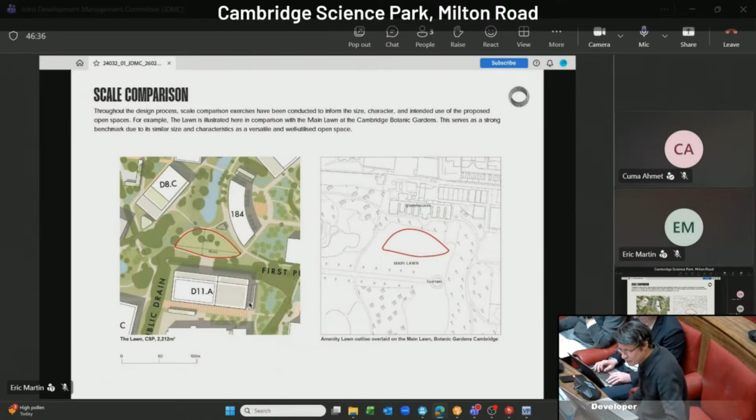We've been doing a lot of comparative studies with other places in Cambridge that have similar uses to the ones we'd like to introduce into the park more actively. This is an example of what we call a lawn, which will be an active green space at the heart of the park, and how it could be used—we've been thinking about it in relation to other similar places, such as the Botanic Gardens.

This sets up a robust strategy for going forward. This is obviously going to have to be a phased development—it's complex, and it will need to be deployed carefully, but with green infrastructure, blue infrastructure, and connectivity infrastructure at its core all the way through.

We would outline a series of scenarios of how this could happen, but essentially the planning application would have flexibility to enable this to happen in different ways. There will be materials where we show, for instance, early transformation in relation to the future of the park.

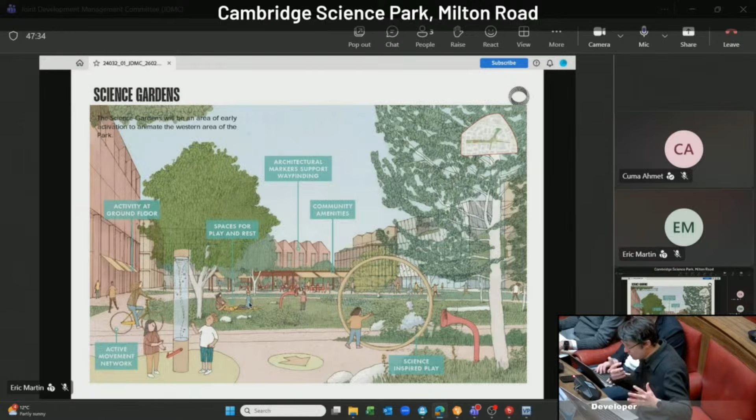There's three main components to it in terms of control documents. There's going to be a series of parameter plans, development specification, and design code, and then there'll be a series of supporting documents that would paint a wider picture and go into more detail on how those three components work. Development specifications is essentially the what, how much, etc., and the design code and parameter plans are the how that's going to happen.

We have included a series of examples of how the parameter plans are looking. The parameter plans are very important, a suite of plans that outline how the vision takes shape very specifically.

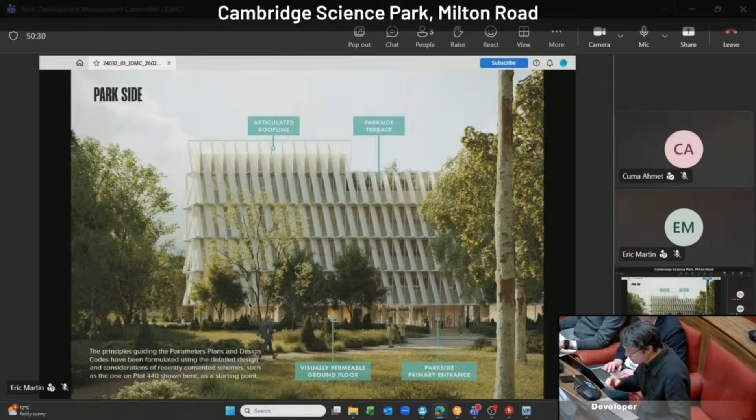We have outlined three main conditions in the park in order to develop all the parameter plans and the design code: one is park side, the other is street side, and finally the edges of the park. We have based a lot of these on developments that have planning consent, including 440, which you just saw, and extracted that knowledge to create a series of approaches and strategies that then set out the more specific sets of documents.

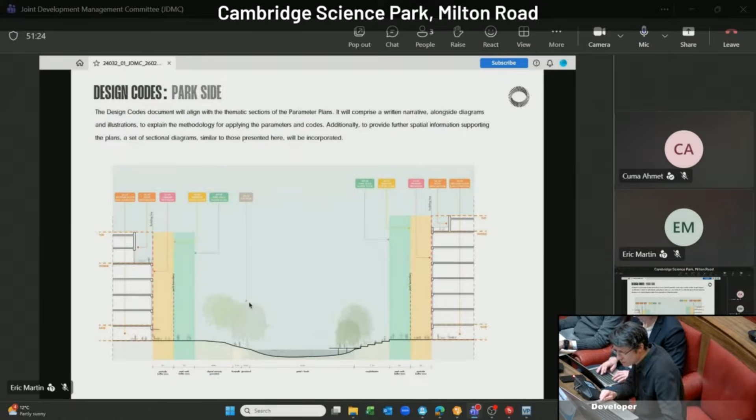For instance, for the park, we will describe in some detail how it will get transformed into a place that works better, that is better connected, that works better in terms of biodiversity net gain, blue infrastructure, etc. Then we'll have a series of drawings such as this, which, in support of the plans and in section, will describe the place in three dimensions. These two sets of information will start to paint a better picture and create a very specific set of guidelines, so anyone developing the park in the future can follow this through, and any reserved matters applications that come in the future could follow a very clear set of codes.

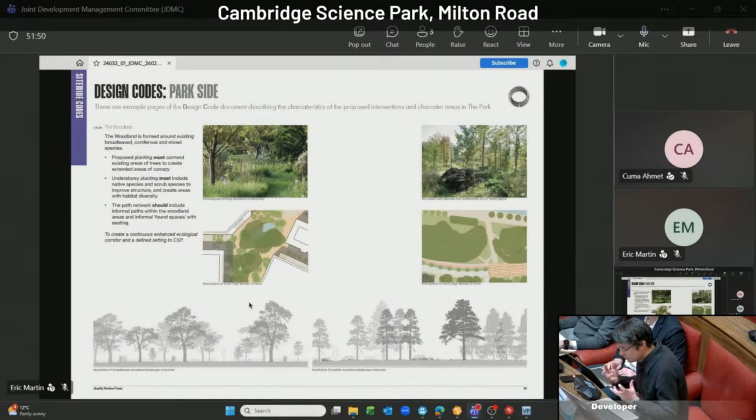These are examples of the type of pages that design codes will follow. In this case, for the open space and the park, we describe specifically what type of character, as well as the type of planting, etc., that could go into it.

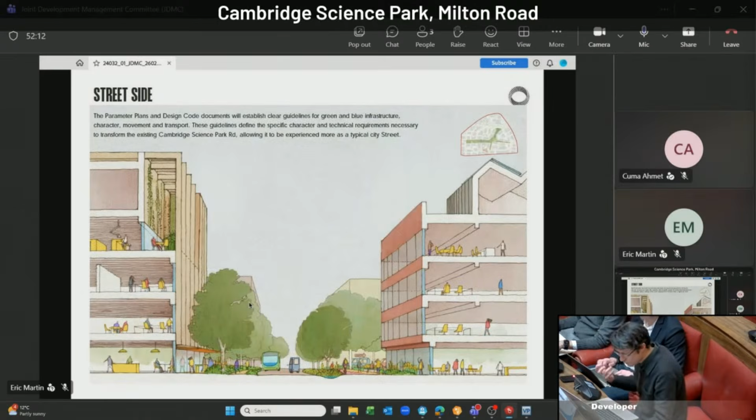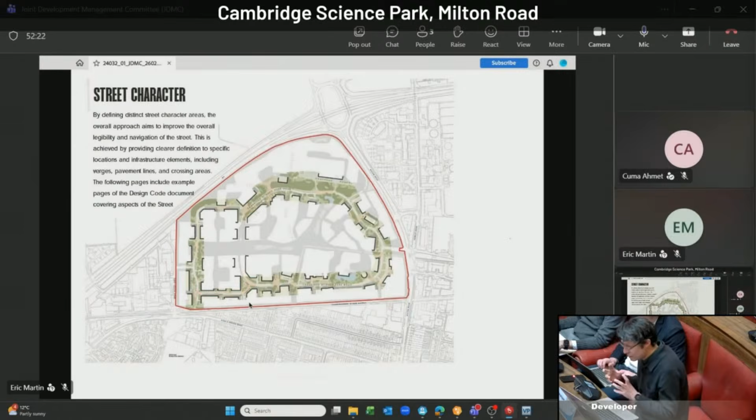And similarly, we'll do this with the street. So the transformation is going to be from the loop road into a street—something more legible, better connected, easier to use for different modes of transportation, including cycling and pedestrian, but also with biodiversity net gain embedded into it, SuDS and all these things, where buildings participate more actively. We have defined a series of street characters that inform how that space then gets contained by buildings. So first we define the open space strategy of the street, and then how buildings relate to it.

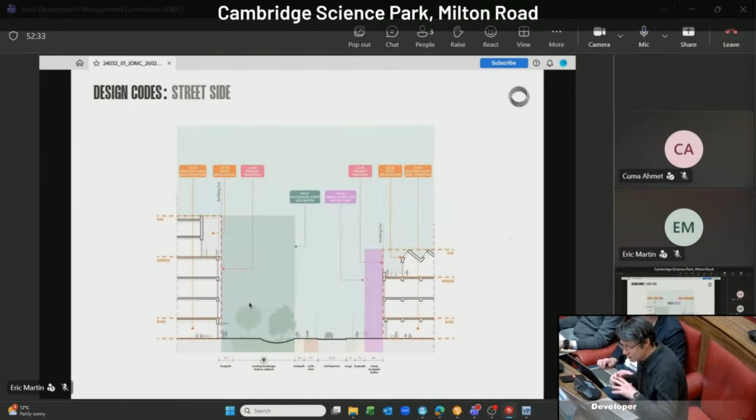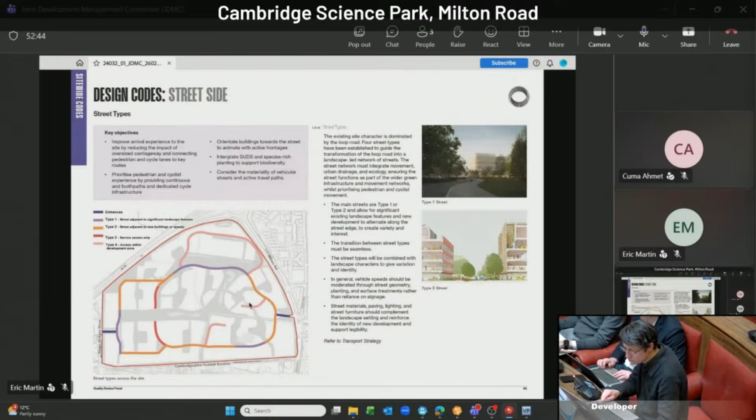And then we'll have a similar set of information that sets up more specifically the characters of the street in different areas and in response to specific conditions. As you can see, these go into some detail in terms of describing how the proposed or existing conditions get transformed into proposed, and the parameters we'll have to follow.

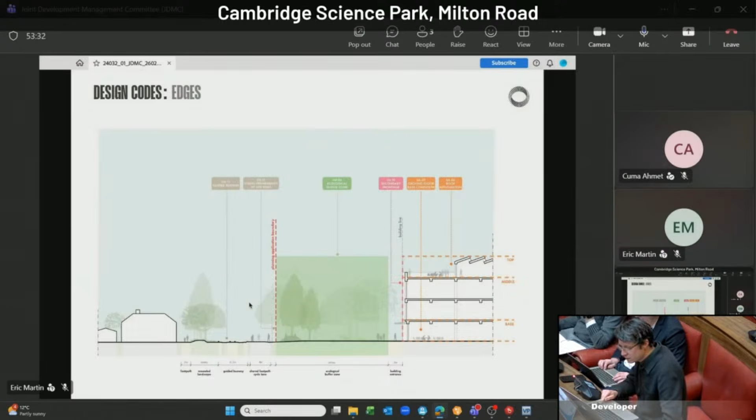Similarly, the edge condition is very important, and we have long conversations with the planning team about how to treat the edges. It's not only about the relationship of the park with its adjacent neighbors and how to create a more permeable park, but also the impact on long and medium range views, so there's an impact assessment in terms of views where edges are very important. We'll describe how those edges need to be treated, the opportunities for transformation, etc.

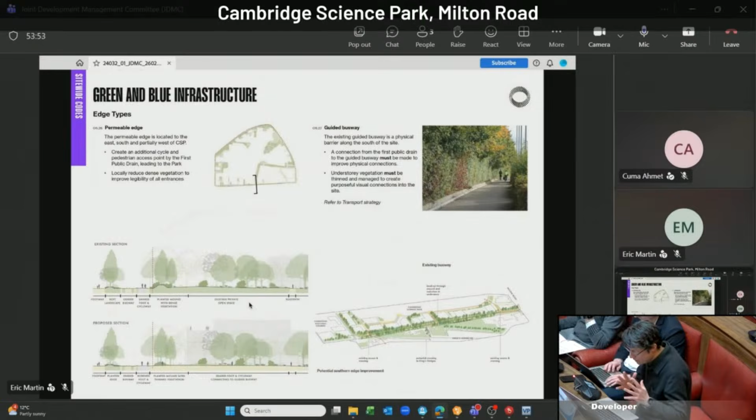I'm just whizzing through these pages because you'll hopefully have had the opportunity to see them in the pack we submitted, to get a sense of the kind of wording we're using, the musts and the shoulds - what must be followed, but there's still flexibility within that to allow for creativity for the developments that come forward to do interesting proposals.

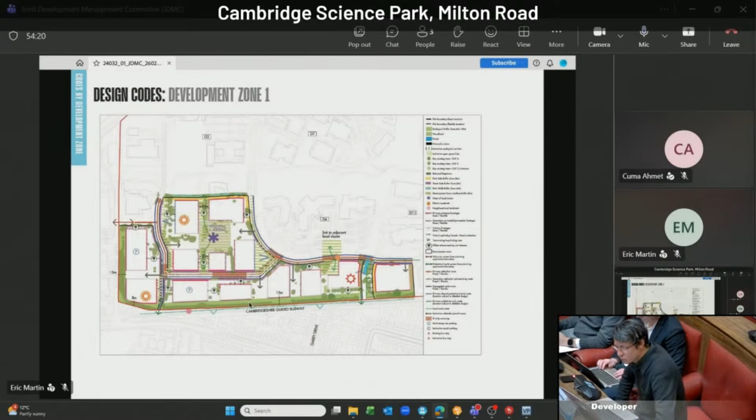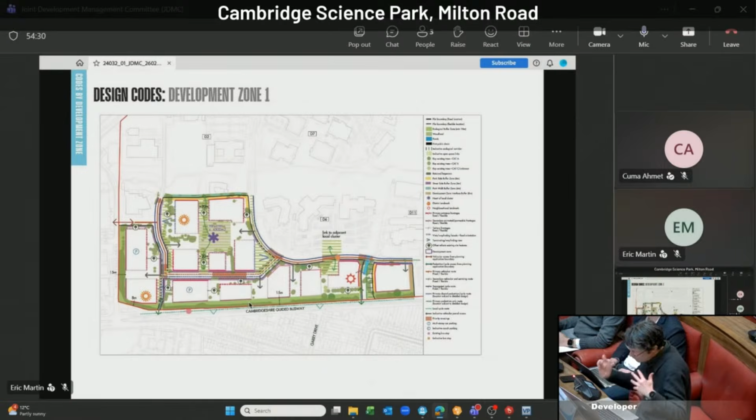The final section will go into more detail on some of the development zones, into 4 development zones which we envisage are likely to come forward earlier. The information in these drawings goes into more detail in terms of defining how the open space relates to connectivity, frontages, hierarchy, and ensuring enough information is embedded into these documents so that everyone following them as guidelines is as clear as possible on how to respond.

So you'll see we've included 3-dimensional information that follows from the plans to set a kind of strategy that starts from the green and blue infrastructure, i.e. the plane of the site, but then goes into maximum heights, things like frontages, facades, landmark buildings, etc., and all the way into massing and roof articulation to create an interesting place.

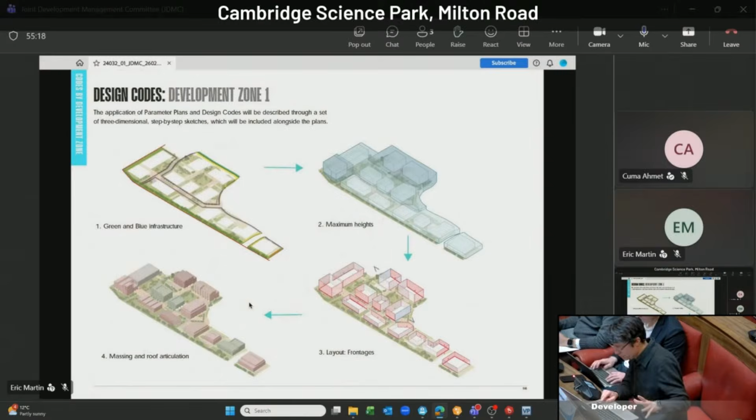So we're not designing buildings here, but we need to make sure there's enough clear information for whoever comes in and develops a site and designs a building, so that the developments are of high quality, considering connectivity, BNG, green and blue infrastructure, and all these things that are important for the park.

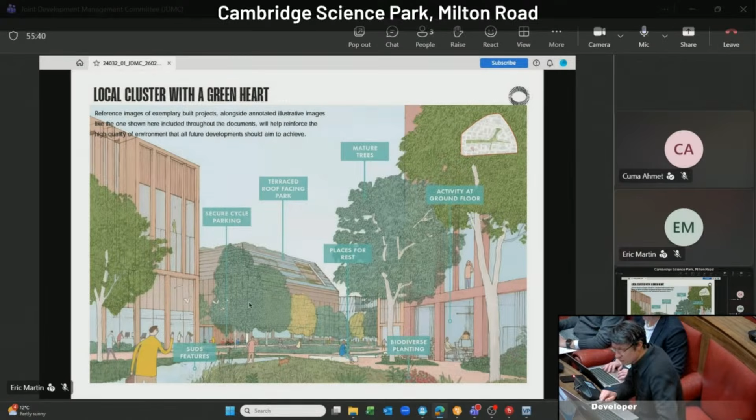We'll also have illustrative materials such as the information and images you see on the screen, including an illustrative plan that outlines what the aspiration could be of the park when it's completed. This isn't just setting up a scenario for the first years - if there's enough information there, following the codes and parameter plans, this vision could be followed all the way through to a complete park at some point in the future.

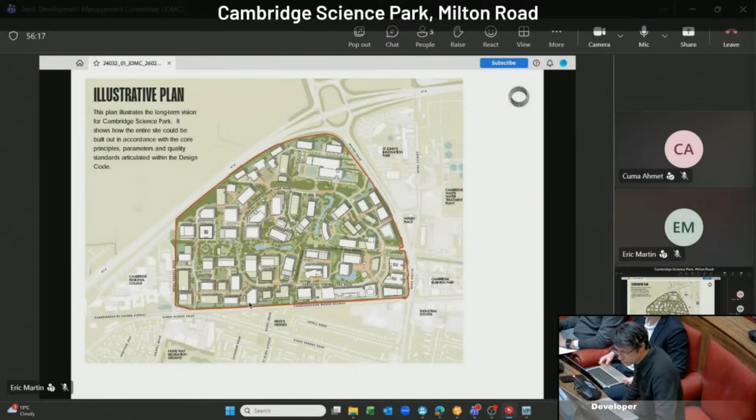So that is the last slide, and I didn't want to go into too much detail about the information because I'm sure members of council will have questions to ask, but also hopefully you've had the opportunity to read through the information submitted in advance. This is just a snippet of what we produce, and you'll get a more comprehensive set of documentation that explains how all this works together. Thank you. Thank you very much.

Before I open to questions, I wonder whether you would like to highlight any particular changes in emphasis or theme since you last presented to us in November. Is there anything we should particularly draw attention to which has moved on?

Yes, the short answer is yes. More than changes, through the feedback and questions we received back in November, and through the process with the planning team and officers, we've been informing the proposals all the way through. We've had more than 10 pre-app workshops and sessions so far, where what you see in the documents has been shaped actively through these conversations with the planning team. For us it has been a very positive and really interactive process - what you see in the information hasn't been generated in a vacuum, but has been very collaborative.

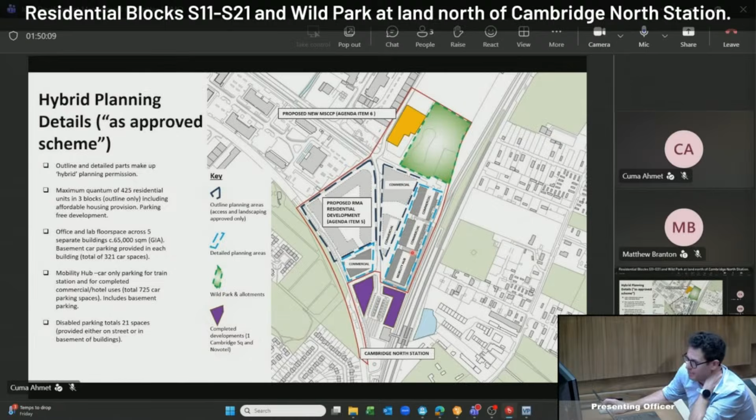Just to finish off the presentation, an indication of how the parking provisions will change, with focus on rail parking provisions. As mentioned, the multi-storey commercial car park proposed will mop up effectively all commercial car parking on the site, so there's no net change there. Rail parking will in fact increase by an additional 200 spaces. The impact of that increased parking provision on the general highway network is currently being discussed with the County Council Transport team. We're confident the applicant team today for item 6 will feed back further on those conversations. That's the end, thank you, Chair.

Just before you move away from that spot, so we're focusing, I hope members, on the reserved matters today, and we'll be taking these 2 applications separately. Obviously there's some apparent overlap between them, but I'll try to confine the questioning to the relevant application in each case. Anything you want to say about the extent of the reserved matters, anything unusual about it in this case?

There isn't anything unusual necessarily to mention at this stage. I'm sure the applicants will present it quite clearly to members today and set that out in context of everything else I've just speedily run through.

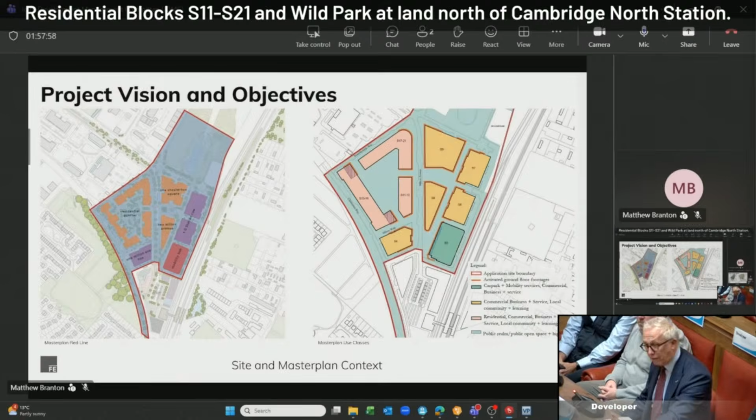We are going to talk about the multi-storey car park. It is part of the 3. You will be aware of the challenges, you know, this is a planning committee. It works in a commercial environment associated with building things at the moment. Basements are hugely expensive. The multi-storey car park performs a simple function.

It's very similar to car parking on the science park. It provides car parking in a more efficient, centralised and affordable manner. Therefore, it gives us a better chance of delivering the 600,000 square feet we've got here. It creates negligible additional trips and results in significant carbon savings.

We will not do all of this up front because we want to encourage active travel. We're next to the station, so the parking will be carefully phased as the buildings come forward. Within the trip budget, we can talk about this. Provision has been made for increased Network Rail passengers.

People will be aware the station has got very busy. Looking at the numbers last week, passenger numbers have gone from 800,000 in 2019 to 1.5 million in 2025. So the station is performing the function that it's meant to. It needs a bit of car parking, and we're future-proofing that in the trip budgets.

The final NMA you'll see is the tweaking of the landscape that's been generated by improvements to the highway and us putting the car park on what is currently allocated for the logistics. So that's probably more than my 3 minutes, Chair, apologies, but hopefully that sets the scene usefully for everyone.

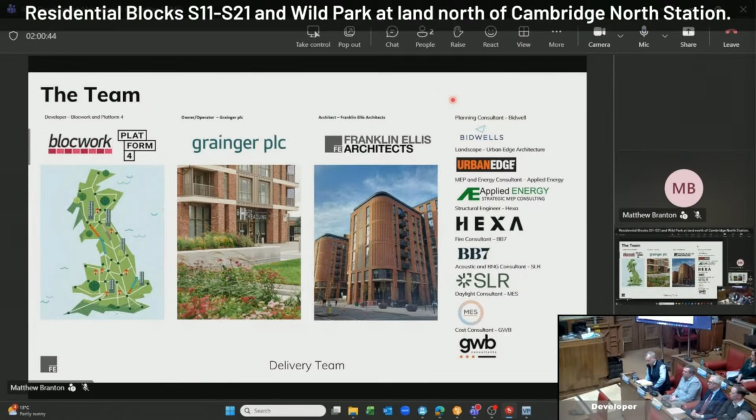There's a much larger team here today, but here today we've got Matthew presenting from the architects, Franklin Ellis, at the end there. We've also got Toby from our M&E design team to answer questions on sustainability. Obviously Mike, and critically John here is from Grainger, who is the funder and will ultimately own and operate the scheme. Just move on to the next slide, please.

Just to reiterate, this is about delivery. One of the schemes that we, as a team, have delivered recently was in Nottingham. Exactly the same team is looking to take this forward, and we've actually taken the planning team round the Nottingham building called the Barnum, just to give the team a feel for the quality of what we're looking to deliver in Cambridge. I think everyone thought that was quite useful in terms of evolving the design together to where we are today. So I'll pass on to the team and let them present further. Thank you.

Just a quick slide from me on the planning process. This is really just reiterating what's been mentioned before. It's been a very collaborative, very positive process for us. We've gone through a series of pre-apps from taking on the initial outline. The visit to the site, to our example site in Nottingham, was welcomed. I think that was a really good opportunity to demonstrate the building type that we're talking about, the build to rent that Grainger are delivering.

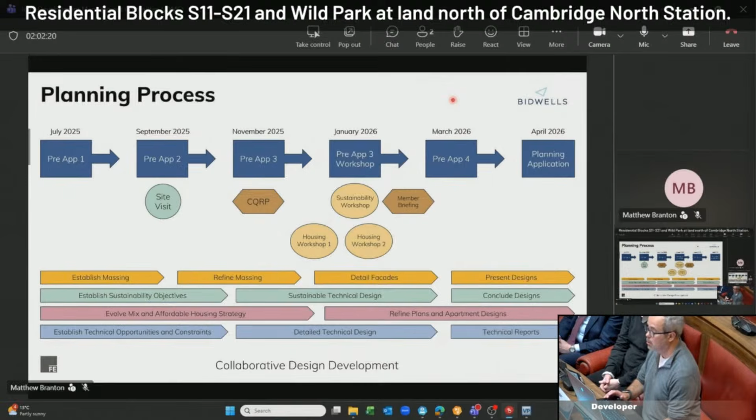We've also gone through the process of the quality review panel and several workshops for the housing on the affordable side, but also on sustainability. It's been an iterative process, but a very good one. So it's really just a thank you to Cuma and his team for helping us bring the scheme together, and I think together we've come up with a really good deliverable product. So I'm going to hand over to John on the Grainger front.

Hi, my name is John Wood, Grainger PLC. A quick whistle-stop tour of the business: established 1912, FTSE 250 and the largest listed landlord in the country. We operate in the region of 11,000 homes, with a further pipeline of another 4,500 homes coming through. Our mission, if you like, is to professionalise the private rental sector, and we're doing this in a number of ways.

Firstly, we're providing high quality homes. Of that 11,000 homes, we've probably got in excess of 25,000 people living in our schemes. We've got a high retention rate - numbers just out last night differ from the slide, we're actually at above 98.1%. That 0.1% means a lot to the execs. Average tenancy length has nudged up as well, to 32 months. So obviously in what we're providing, we're getting something right.

We've got a whole staffing model, so everyone you see working in our schemes are Grainger staff. We don't outsource anything to managing agents - we do our own lettings and everything. Then we're bringing in IT - that's the third way that we're trying to professionalise the system. We're using tech in a number of areas.

It's straight from the application process - you can do everything online if you want to. Once you move in, we've got the app, so you can speak to people, book repairs, book bookable space, meeting rooms, dining rooms. You can even move out very easily. We're trying to do a full cradle to grave using technology, but there are instances where people are technophobes, so we've still got full staff on site, so you've got a people person you can go and speak to.

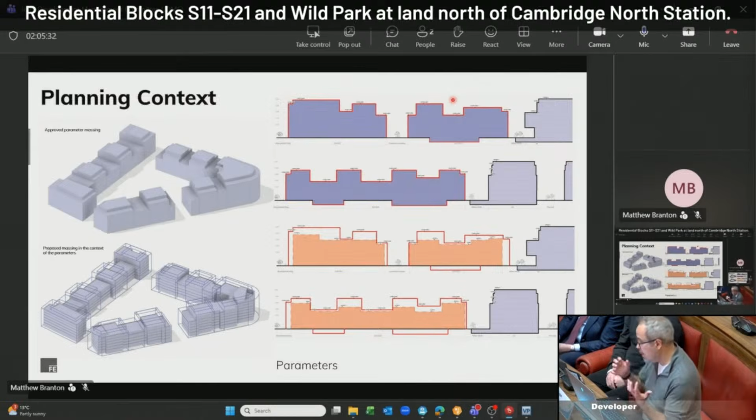As an illustration, top right is the maxed out approval, the parameters. Bottom right is where we sit within that. And you'll see we've actually dropped scale slightly in terms of the absolute heights.

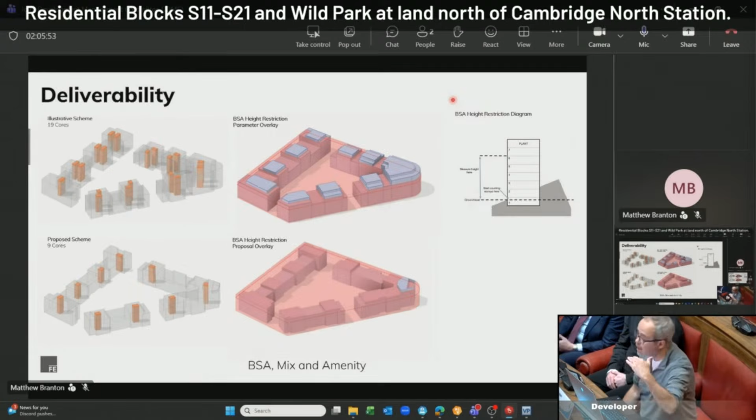That's mainly as a result of, in the progression from outline to reserved matters, the Building Safety Act came into force. That set some key criteria in terms of usability and set height levels for different classifications. So partly on the design front and partly on the delivery front, we've now adjusted to sit below that 6-story threshold.

We just poke out here with a little bit of plant, but no residential accommodation. So we sit underneath what's termed as the high risk building threshold. We've also used that opportunity to rationalise the cores to increase deliverability.

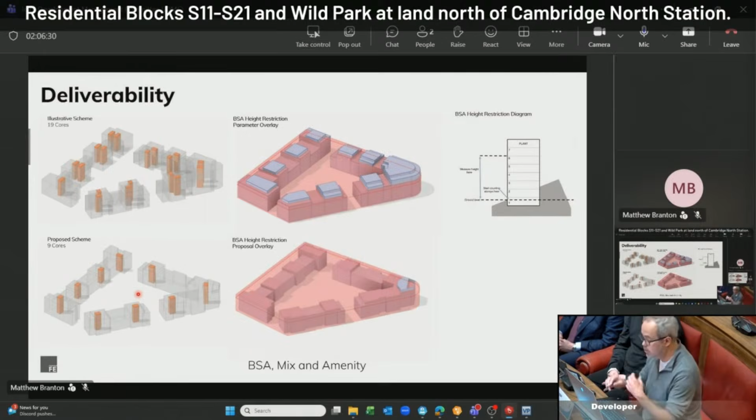We've dropped from 19 cores to 9. But in that change, we're still holding on to all of the key characteristics that were built into that outline approval. So just going to drop back to Richard, I think, just to touch on the affordable element.

Just to clarify, Grainger will also, Grainger have an RSL called the Grainger Trust, so they will also be managing the affordable homes. The scheme will be delivering the same number of affordable homes as per the outline, so I think it's 62 units.

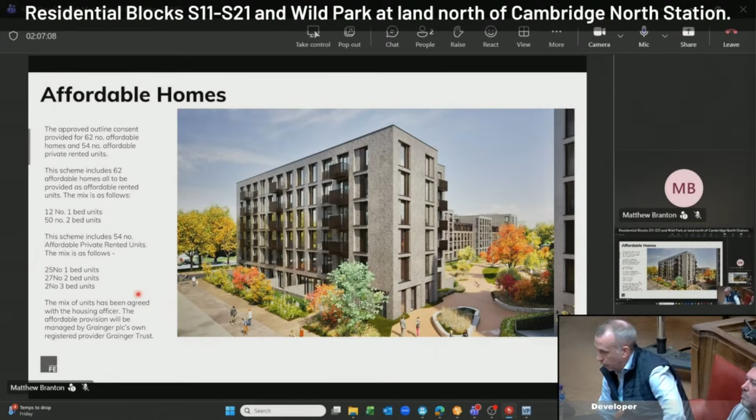The mix has been agreed through meetings with the housing officer and Kuma and the team. I think it's quite useful to point out that Grainger will be managing this element of the scheme as well, and it's all coming forward as one.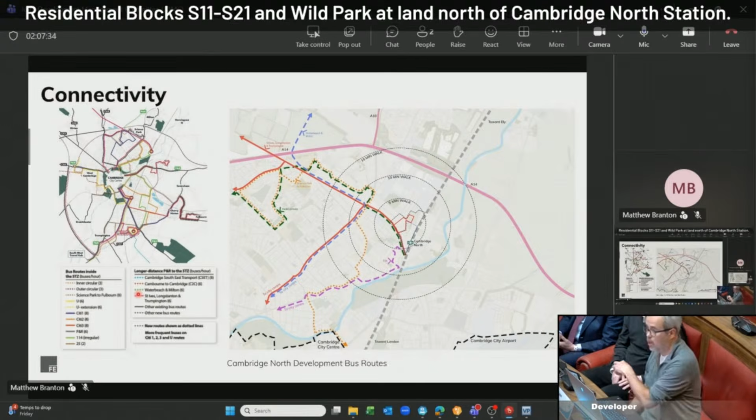Thanks, Richard. Connectivity. Now, you know where the site is. It's an extremely well-connected site, extremely sustainable, obviously right next to the train station, but also immediately adjacent to the substantial bus route. So we're very connected, very sustainable, a perfect position really for John's build-to-rent offer, for the Grainger offer. I'm not going to dwell on that too long.

So just to talk a little bit about the attitude to the design evolution that we took, taking the outline forward as guided by Cuma, Jonathan and the planning team as well. So if we start here, top leftish, base volume.

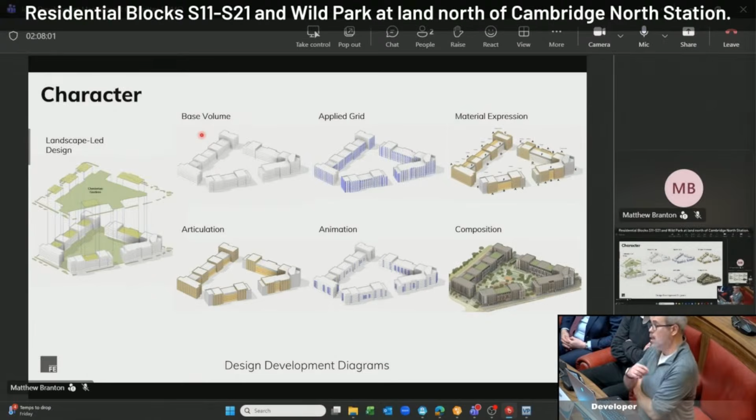The base parameters set the volumetrics, set the overall attitude towards how blocks were distributed and that articulated form. What we've done is, on top of that, applied a rigorous grid to allow for the fenestration to knit all of those individual parts together. So we get some rigor in that form, which is purposefully broken up to scale.

Moving on from that, we use material selection. This is largely a brick-built scheme with a local palette, but we use subtle variations in that palette to help reinforce the articulation, the vertical and the horizontal, how the section and the plan are broken into different planes to help handle the scale of the development.

Then we reinforce that purposefully with the articulation of the fenestration type. So you can see from the diagrams a series of cores which are expressed vertically, so we tend to emphasize the vertical on those elements.

And then we have linking pieces, which emphasize the horizontal. We want lots of legibility of where common cores are, where entrances are. So it's a legible building for the inhabitants, but also all those passing.

It's going to be a well-trafficked area in terms of trips and such like. And also we are putting particular attention on areas that are kind of gateway, where we announce the scheme as we come towards it from the north, and also where we open up towards our courtyard. So the diagram on the left, landscape.

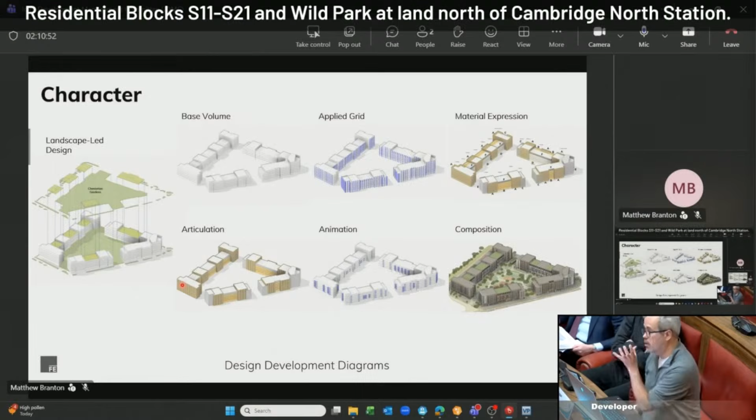We also then layer on balcony use, different balcony types, different extensive glazing, and then the last bottom right is composition. So with all of those things, we've got a lot of competing agendas, things that push and pull, and we've been working that composition with our design team, with Cuma's technical team on the sustainability side, and we've had very successful workshops on that regard.

The blue is the amenity spaces that are there for the residents, contained and offered by Grainger. John made the point that the offer from Grainger is very amenity heavy, and a very wide range of spaces, co-working spaces, reception, all of the back of house support you now practically need in life for parcels and such like, but also a lot of community focused places.

It's a place to meet, to gather. There's a program of events, there's TV rooms, cinema rooms, there's large kitchens, so you can actually have a dinner party, invite friends around a larger dedicated space. So very flexible - those are the blue spaces.

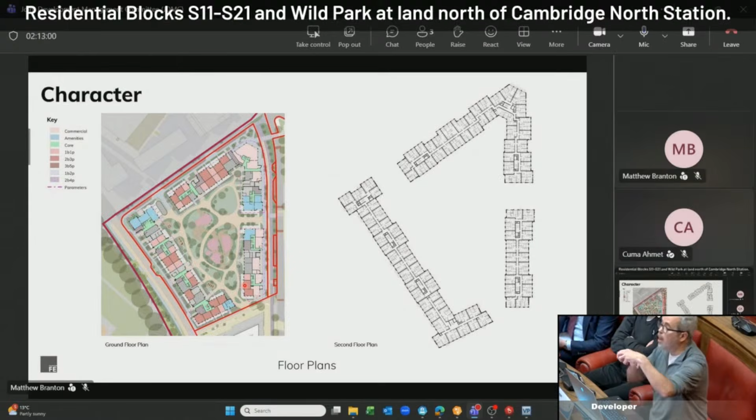So on the right, upper floor - it's a stacking arrangement, but it breaks down as we go up the height of the building. So character - talked a little bit about articulation. It's a heavily articulated massing form, and then focus is applied in a few key areas. This is the block that introduces the scheme from the north.

Matthew, just to say that we are running out of time, so if you could draw things to a conclusion, please. Okay, right, okay, yeah sure - quite a few, so I'll rattle along. Sorry, I thought Mike's time was separate. We were told Mike three minutes to begin by the chair. That's fine, oh fair enough, yeah that's fine, carry on. Sorry, I will pick up the pace slightly.

Frontage articulation - I talked about the applied grid, the grid of the fenestration that we flex, so that's very strong and binds together. Materials - that material palette, changing, highlighting gateway, highlighting the cores and such like, and then character animation.

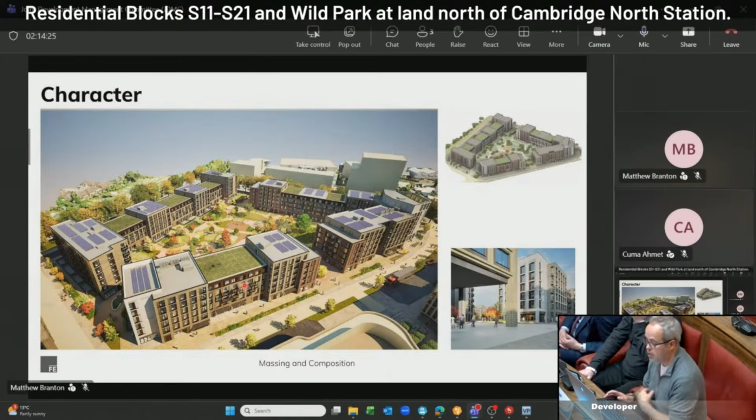We've got this ground floor edge which onto Milton Avenue, which provides a whole range of commercial spaces as well as the entrances to the individual apartments as well. And that goes together with the Wild Park off-site as well to provide the overall composition, which we've tuned and also satisfied the sustainability aspects.

So I'm going to very quickly pass on to Toby. Lean into your mic. Yes.

Yeah, hi. So the key thing to say is we've had some really good sustainability workshops with the planners. We've modelled over 10% of the different flat types. They're very pleased with the proposals that we've put in place and all the steps that we've taken to date. And I'm happy to answer any questions on any detail later on.

On the kit of parts that I referred to in terms of the elevation, we've got a lot of reveal detail in the fenestration patterning, which helps in terms of shadowing detail, but also helps in the environmental aspects, gives us high-level shading and such like.

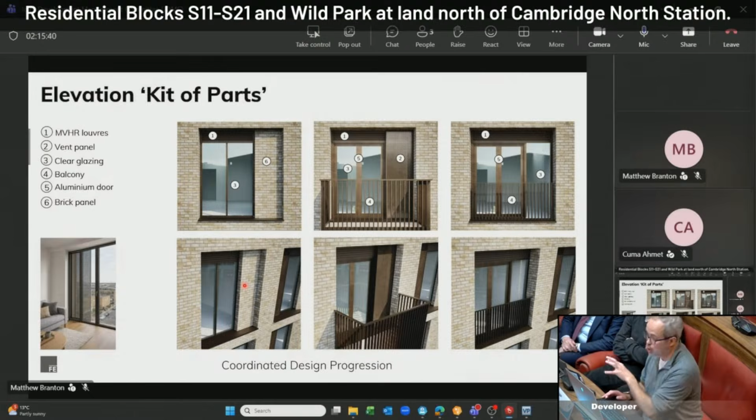And then by orientation, we flex that kit of parts to allow adequate ventilation and high levels of daylighting. We're still in a very final tuning phase, but we've got a 1% issue in a very small area of the site, which we're refining through. We used that to tune, through the pre-app process, through the technical design, and through liaison with the sustainability team, we've successfully tuned to a scheme that passes to a very high standard in terms of daylighting, but also, from Toby's point of view, that we contain overheating. So orientation and tuning has been a very important part of the process.

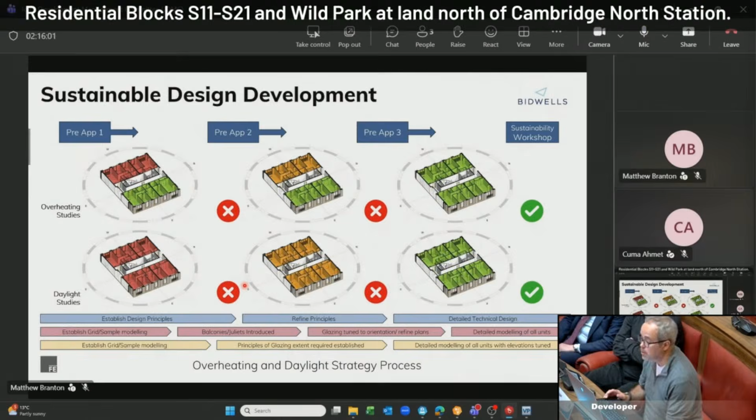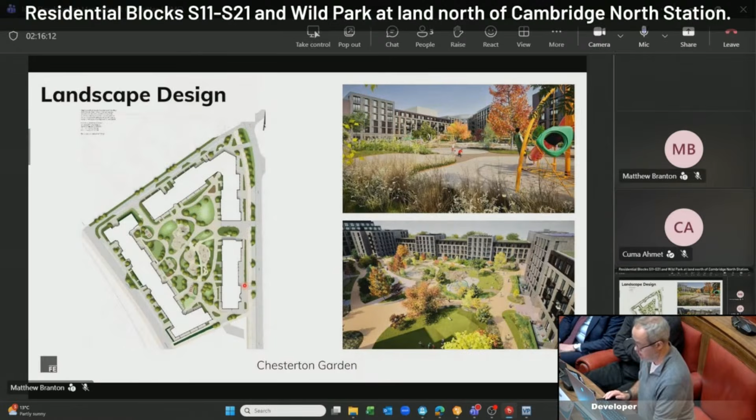Landscaping design, as Mike said, is approved. It's a great space. It provides a range of amenity spaces, and we're just adapting around the edges as necessary. And then just a couple of illustrations on the amenity spaces, the kind of quality of the amenity spaces, which are scattered in the light blues.

The cores, the access for residents into the building, are spread across the development. The purple arrows show those. We also have visibility through those cores so that there's a sight line from street to courtyard, to entice and open that offer out. And also you see in the purpley, light bluey colour, the bicycle storage. So we've got at-grade bicycle storage distributed, policy compliant, across the scheme. All the residents' is inboard, distributed by core, as is the refuse structure.

Yeah, we'll leave it. That's fine.

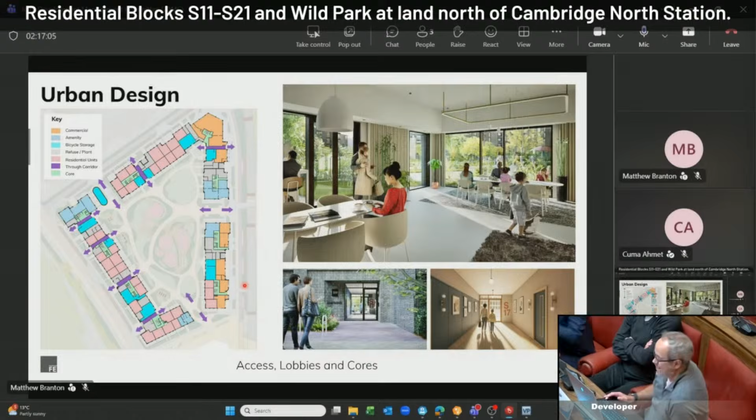Okay, thank you very much, all of you, for that presentation. Richard, was there anything you wanted to add to wind it up before we open it to questions?

Thank you, yeah, just to wind up really. So 12 months of design work's gone into today. The process has been very iterative with the planning team over that period, and we're ready to go. We're ready, we've got funder, we've been talking to contractors, we want to get on with delivery. Subject to getting the reserved matters approved, we will be looking to start later this year, early next year with construction. So thanks for listening, and please let us know any questions.

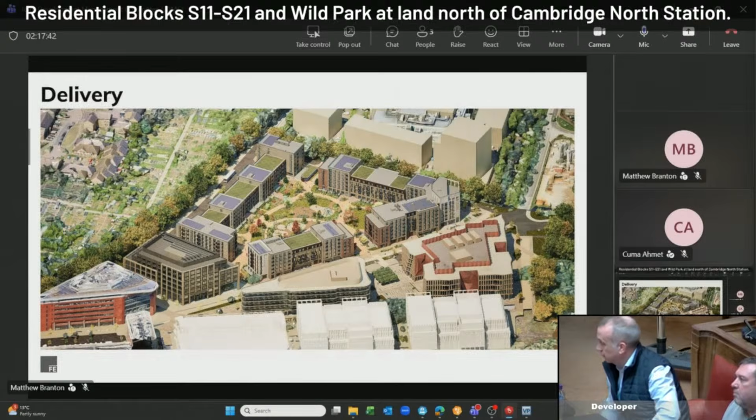Thank you. So I'm now going to open it to questions. Before I do so, I am going to remind members that it would be helpful if you could confine yourself to questions and clarifications, and remember, of course, that we're focused on the reserved matters and the likely amendments that may come forward. So I have Councillor Khan, Councillor Bradnam, Councillor Smart, Councillor Thornburrow, Councillor Porrer, and Councillor Illingworth. And no doubt there will be more, but let's start off with Councillor Khan.

A simple thing, you haven't mentioned the flat sizes and the distribution of flat sizes. Is it all single 1 and 2 bedroom? Is it for single people? Is it for couples? Is it for families? What's the range and what's the provision, and how does it distribute between the affordable and the market?

Let me just drop back, sorry. A wide range, broadly speaking. So we've got a range of 1 beds, 2 beds, and some 3 beds distributed across the affordable and the BTR. Let me get - sorry, there's a slight mistake on the right. I have ratios: 38% 1 bed, 57% 2 bed, and 5% of the accommodation is 3 bed. And in the affordable, there's a distribution of 1 and 2 bed, 19% 1 bed and 81% 2 bed. And that's kind of born out of John's input in terms of mix and such.

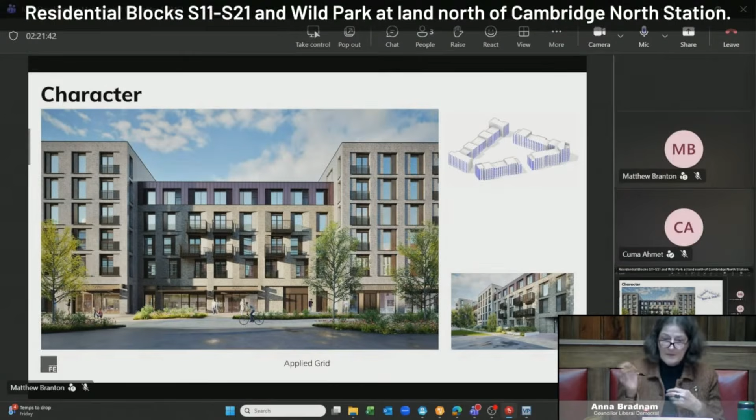And then the third one was, given that this triangular development all faces inward, I'm wondering what provision you're making to minimise noise problems, because that could be quite percussive across the space. We know elsewhere at CB1 we've had problems with people who have balconies - the problem of road noise, which initially wasn't being used, and then when the road was used, suddenly there were complaints. So one person playing a radio could severely impact the quietness for everybody else. I just wondered what you're thinking about that.

And also, are these all for rental, or is any element of it for sale?

That's okay, I'll jump in. So I reflected before on the management model - we have on-site staff. So the noise issues, we're not dealing with individual homeowners. Everyone who lives there is a tenant of ours, so they've got duties to respect other occupants within the block, and we manage that quite well.

Sorry, what was your question? Rental - yeah, 100% rental, as I just touched on. There's no private for sale. We are the owner and operator of the entire estate, including the board.

Yeah. Councillor Smart.

One question - so you gave some numbers for affordable accommodation, but you didn't give a percentage. So I worked out that you seem to be suggesting 27% affordable, which is above what you have to provide. Can you confirm that it's 27%, which is 62 plus 54 over 425?

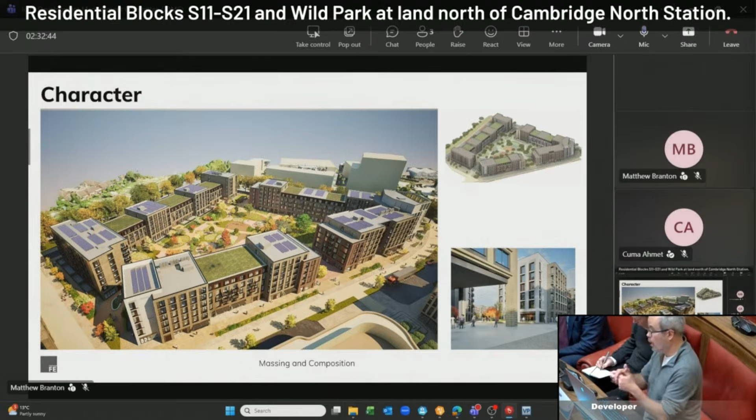So one of the great things that the outline captured was all of the public realm is very generous, all of the edges are very generous. So we're mimicking the character of other street widths, and some of the street widths that they showed in the earlier presentation today. So we've got ground floor residential on both sides of the street, so there's a dialogue between residents on both sides. We've been talking about traffic flows and also the pedestrian flows, because one of our opportunities here is the routes through the courtyard tack into their planned route through the whole development. So there's a good bit of dialogue which is making our scheme better and helping facilitate their scheme as well.

The height - we are Building Safety Act compliant, so we have had to drop. We've kept some of the sort of visual height on the corner on our nose, and we've done that by the extension of the pergola type, and we've put some of the plant provision. We need very little on roof plant because of the heat pump scenario. But we do have plant provision for the commercial uses, and the major commercial use, which is sized up to sort of Sunday trading size, is at the nose. That's the most obvious place for that retail offering. So we're trying to get a win there. We need plant on the roof - we've dressed it, we've used that to elevate height a little bit.

Probably worth maybe Toby just touching on the heat pump point as well. Yeah, so obviously modern buildings, highly efficient envelope, fairly very airtight buildings - the heat losses from them is minimal. Hot water generation is hot water generation, so there's an air source heat pump to generate that. In terms of the heating, that's done by direct electric. Again, all been discussed with the sustainability team, they're in full agreement. The key benefit being that by not having central plant, by not having hot pipes distributing around a building 24/7 and heat interface units, you really do help with the overheating, and we're scoring really well on that. And even though we've got single aspect, actually great results in terms of that overheating provision, mainly because of kit of parts, window, and facade detail.

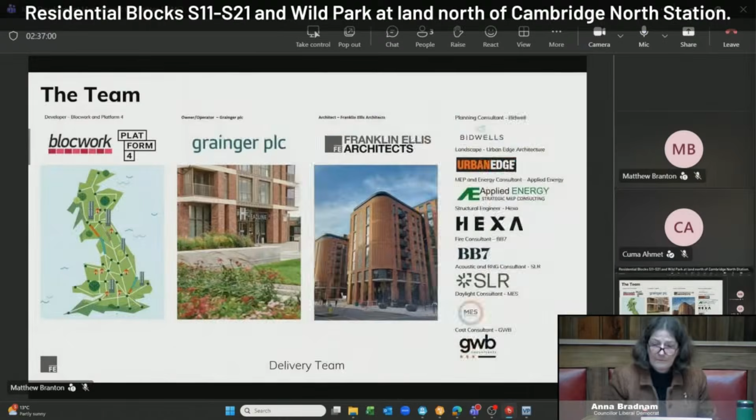So we are actually looking, as part of the next steps and the planning submission, at the different glazing details so that it's not all the same glazing, so that the north elevations do benefit from more heat transfer through, more daylight through, than the south. That's kind of tuned to the very particular, as well as the facade treatment.

Okay, thank you. Councillor Bradnam, does that deal with your questions? Yes, thank you very much. Councillor Stobart: Chair, thank you.

Just a clarification on the heat pump, use of heat pumps and mechanical heating and ventilation. So you said that the heat pumps would be solely for hot water provision. Are these heat pumps going to be mounted on the roof?

No, so in the slide I had to unfortunately skip over, it does show we've got individual utility cupboards. Each of those utility cupboards has got an incoming metered electrical supply, an incoming metered water supply, and an individual air source heat pump, which we'll be working with Dimplex on to make sure those are designed correctly. On the right-hand side there, individual MVHR units provide whole house ventilation. So again, this is really welcomed by the sustainability team in terms of people having individual control of their environment.

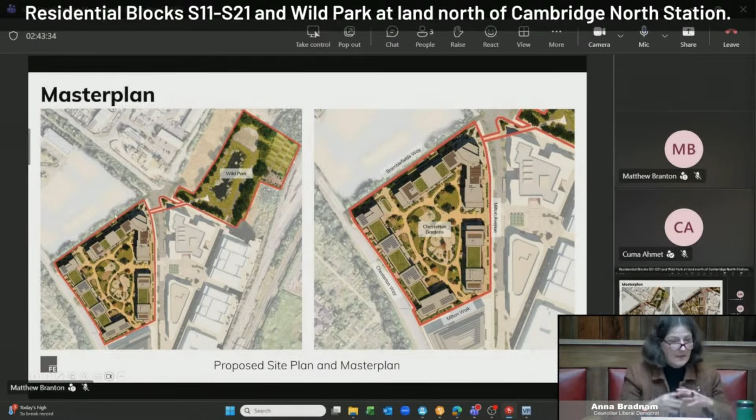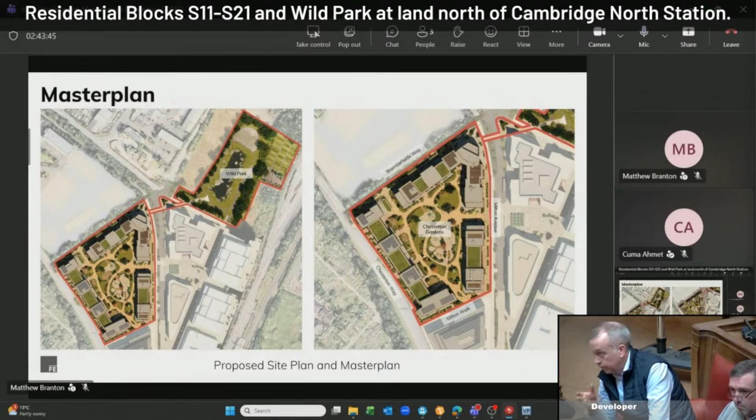Thank you for that additional information. Now, we're going to move on to agenda item 6, which is, of course, related. I'm going to give us 5 minutes to just make some adjustments. I know there may be some changes in the team, but thank you very much for your presentation.

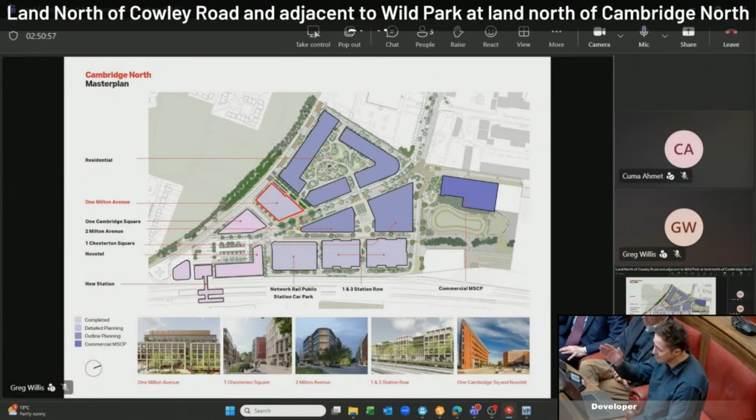So where we are on the master plan, we're outlined in red. This is the commercial building just to the north, just to the right of the built development so far—that's the station, the hotel, and 1 Cambridge Square on the left-hand side of the screen. We lie just to the south, left on the image, to the residential development you just heard about.

So this was approved, and we are showing some updated plans that represent two minor changes. One is the removal of the basement car park, more on that later, and how that implicates us in the design of the building. The other is a slight change in the brief—we're moving from a wet lab design to a dry lab design.

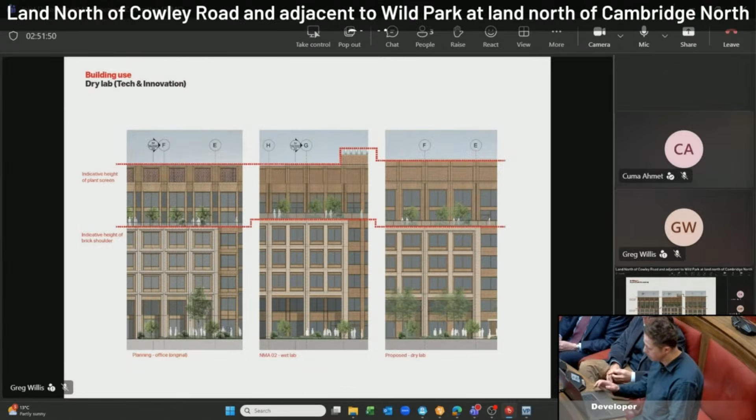What that means is these three images show the design development. The extant planning permission is the one in the middle, so we're reverting to the original planning application in terms of number of stories and orientation. The brick parapet line reduces slightly, which you can see on the right, and we also lose the flues and flue housing that popped out of the top of the building in the extant planning permission.

The impact of the loss of the basement is firstly in cars—we'll talk about where that's gone in the master plan later—but also cycle spaces. Cycle spaces are now all on the ground floor, within the building itself and in a cycle pavilion in the landscaping directly adjacent. We've actually increased the number of cycle spaces over the extant planning permission to 392 spaces, up from 349. The pre-application feedback from officers regarding bike sizes, benches, and the size and configuration of the pavilion has all been incorporated into the current drawings.

The other thing alluded to earlier is the environmental impact of taking these basements out, which we think is really important. We've done some studies to see the impact on this building alone. Removing the basement represents, just in the substructure and superstructure alone, a saving of over 2,000 tonnes of carbon. When factored over the overall building, that's a 12.5% saving of embodied carbon—over 3,000 tonnes of carbon. So it's a good news story with regards to the environment.

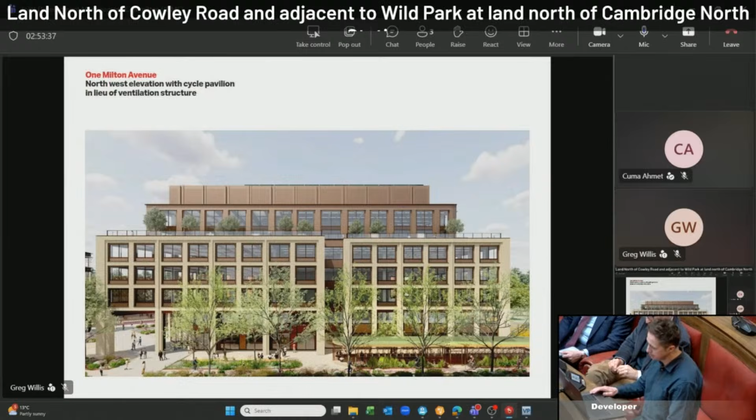Another benefit is that we've removed all of the cycle facilities that were in the basement and brought them to the ground floor. All of the lockers and all of the accessible cycle spaces are now within the building itself, along with all of the showers. So there's a nice one-level route from the cycleway through parking the bikes, storage, into the core and into the office—no going down to the basement to come back up into the rest of the building.

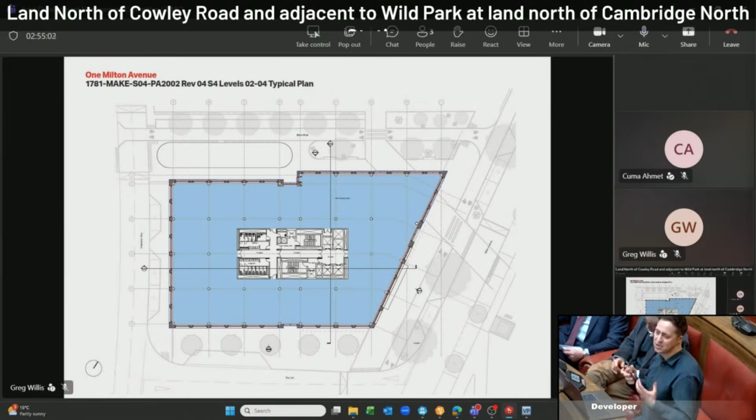The only real change is that the internal structural grid has shifted from a wet lab setting to a dry lab setting, but that's just in the internal organisation. We still have the level 5 terrace, providing valuable amenity to occupants, and right at the top we still have our commitment to renewables, PVs, and biodiversity in terms of a green roof. As I said, the difference at the top is that we've taken off the flues—that additional height with the flues and flue housing—because we don't require it anymore for the building.

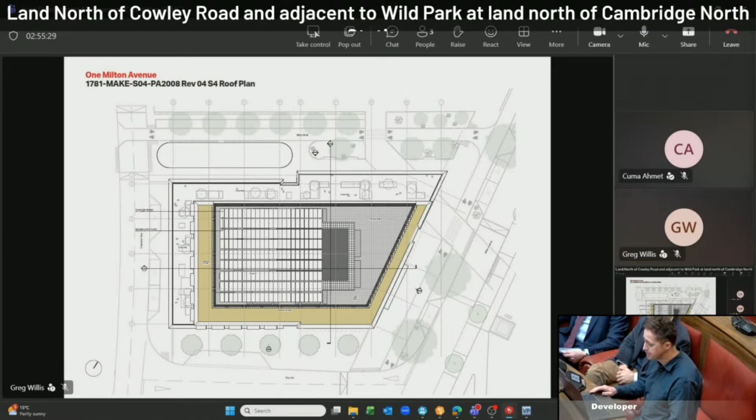from the residential, the other side of the guided busway. And the main difference is that, again, the omission of the flue and the flue housing that poked up at the top previously in the extant permission. I will now pass over to my colleague from Stripe, who is going to talk about the multi-story car park.

Just to set the scene, Councillor Smart, I'm going to disappoint you here. This isn't about buildings. This is an outline planning application, so we talk about the principle, the height and the massing of it. But Simon's just going to run through the principles of the outline and the discussions we've been having with your planning colleagues.

Thank you. I will start with presenting the site plan and the quick analysis we've done to get the basic consideration for the future design approach.

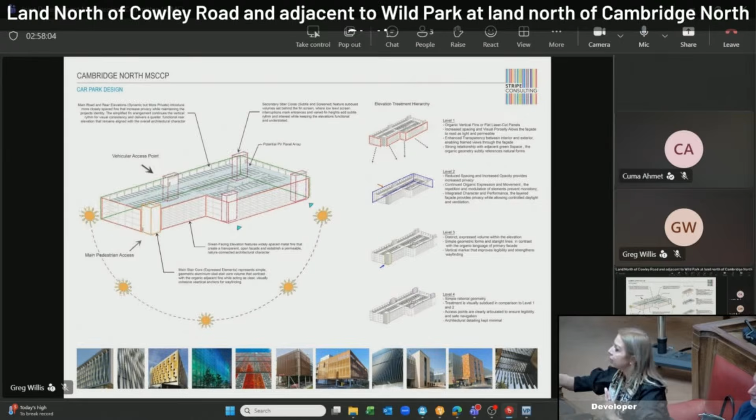Going around the building towards the main entrance where the existing road is would be, we will continue with this linearity and the same rhythm of the elevation, though would make it a bit more robust and more private.

That would be the second level of the hierarchy, and moving on, the third one we would consider to be the main stair core, which is a distinct vertical element, which, though contrasting with the fluidity of the elevation, will help with wayfinding and also add structure in the reading of the elevation.

Going around the side to the secondary cores, this will be treated as a more subdued, covered version, even though material of the core itself, it will be more rhythmic and simplistic. It will have the fins going all around the building, incorporating these vertical elements

into the design. We looked a lot into how to point out and to make this building sit better in the public realm. We try to make it not an independent structure - it's more like a complementary backdrop for the open landscape, which also, looking at the way it was organized, helped us with defining the position and the orientation.

and how all the movements, pedestrian and cycle movement, can walk around and approach the building - it's just the fluidity of the whole thing, trying to be, even though it's important and it will be functional there, more of a backdrop, stepping back behind the nature and the landscaped area.

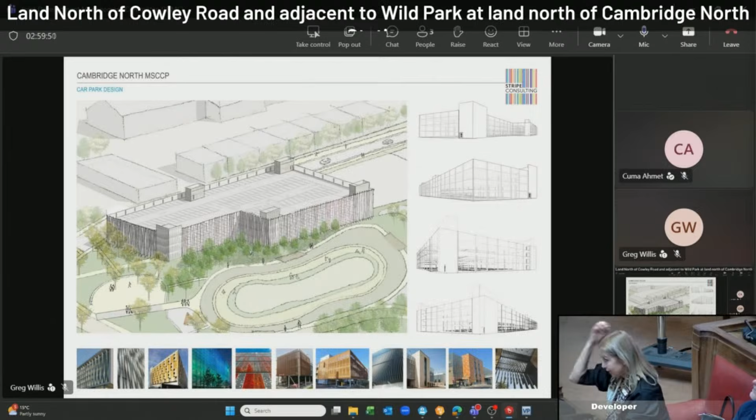As we said, it's still early beginnings. We were looking at the strategy of how these architectural elements could wrap around the building and still keep the transparency. Thank you. Going to the plans.

Starting from this design and the open space, we moved at the movement, having the access from the existing road, which would be the secondary elevation. We try to have the design keep away any vehicular access from the open area. It did help having the adjacent road, which will provide the access.

And talking about the access, we are considering having a dual lane exit entry in the parking. From the vehicular point of view, that would be the only access. The circulation would be one-way clockwise. The project is designed as a vertical circulation model. There is that little section sketch at the top.

The grid, structurally, is a simple grid, 5 by 16 meters for the columns. Floors will be just the usual planks we will be using.

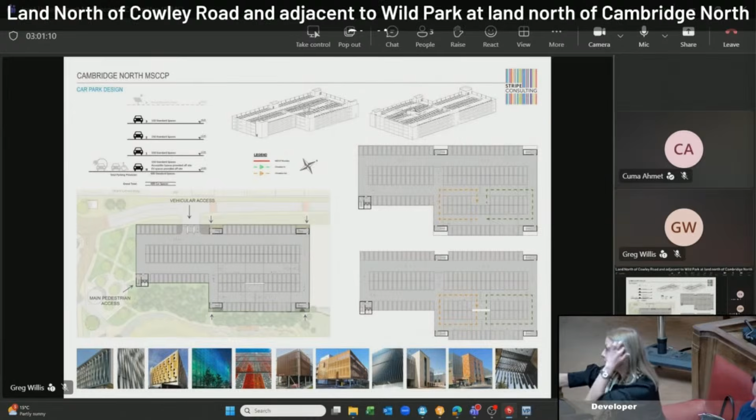I'm just conscious the landscape architect always gives the rough bit. Yes, okay, fair enough, we can deal with questions. Okay, fair enough. Thank you, Mike.

Shall I set the scene very briefly? This is a non-material amendments application in the sense that all of the changes we make, Robert's job is to glue them all together through the landscaping and, where possible, enhance it. So you'll see we've taken the opportunity to enhance the landscaping. Simona mentioned the entrance and making that legible, and we've used that as an opportunity. There's also some minor tweaks to the road network included within that.

I'd better let Robert speak, I think, otherwise.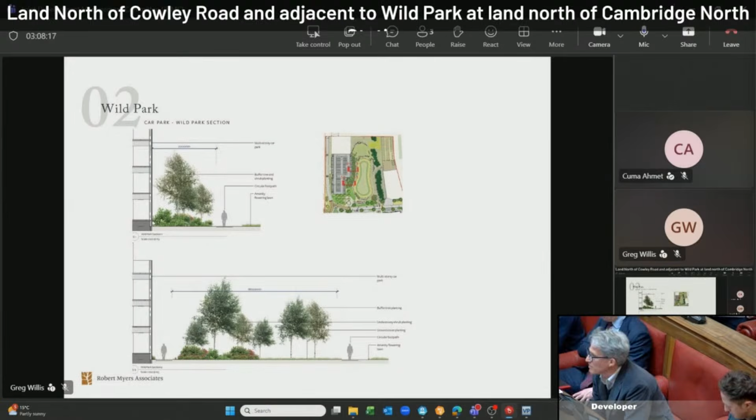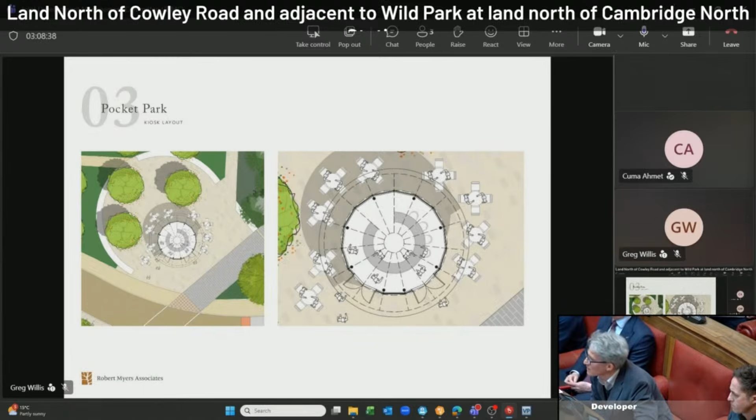These are some preliminary sketches for the kiosk building within the pocket park. The kiosk is actually coming forward as part of the multi-storey car park application, but just to give a sense of scale and how we imagine that building functioning, it's a simple kiosk with a central servery, outdoor seating, and a generous canopy overhang.

These are just some images to explain the aspirations for that kiosk building at the top and for the planting at the bottom. We'll be talking about this open mosaic-mimicking planting, which will by definition be very drought tolerant but biodiverse, with lots of plants for pollinators, mimicking the ecological interest of what's currently on the site.

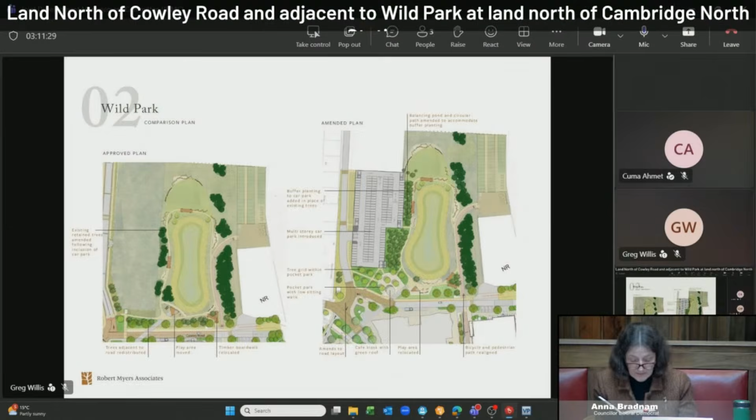And also, did you mention a SUDS? Is that what the semicircular area on the right-hand side of the multi-storey car park is? And remembering, as I did fondly, that this was a very good reptilian habitat following the shunting yards, I think we've probably lost most of that now.

And also, is this multi-storey car park intended to be car parking for your residential block and for 1 Milton Avenue, the commercial site? And forgive me, it might be out of your purview, but what will happen to car parking for the railway station? Because as you admitted earlier in your presentation, there is still a need for car parking because the use at Cambridge North has increased dramatically in the way that you described.

What was it? I did write it down at some point. So what's going to happen about car parking there? And if that's outside your block, then do please say.

Quite a lot to unpack there, Chair. So do you want to start off with the landscape and the loss of the trees, Robert, if that's okay? Yeah, no problem. So just on the access point, yes, the access for vehicles is all from the west off the Hall Road. Access for pedestrians all from the south through the landscape and the pocket park.

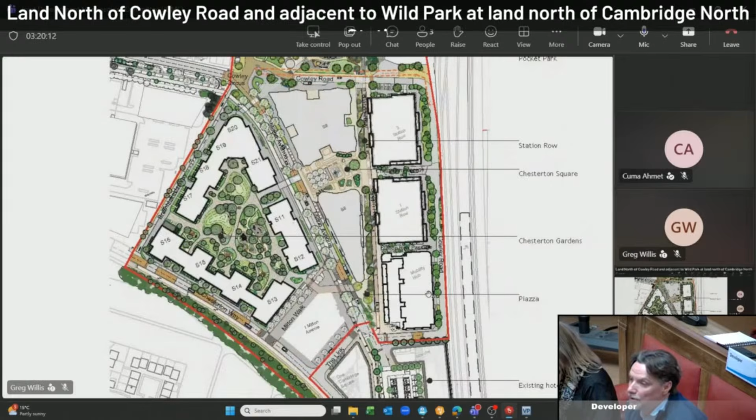So the mobility hub is the building just to the north of the Novotel building. That is the mobility hub there. That was part of the consented scheme, so that was always envisaged to have the Network Rail car parking within that building. In terms of this multi-storey car park to the north, that picks up all of the commercial car parking spaces across the whole of the hybrid scheme - all of the basements under each of the commercial blocks, including the basement under the mobility hub, which was for commercial use. So it takes all of those spaces that were in the basements and puts them into the multi-storey car park to the north. The mobility hub, just to the north of the Novotel building, is the home of the Network Rail car park and is a short distance under the opening between the Novotel building to get to that multi-storey car park structure.

How many spaces are in the mobility hub, and how many in the other? It would be the existing 428 plus the 200 additional spaces for Network Rail use - so 628 spaces in that building, next to the Novotel. And how many spaces are in the new multi-storey? 618, which is a like-for-like replacement for the commercial spaces already approved.

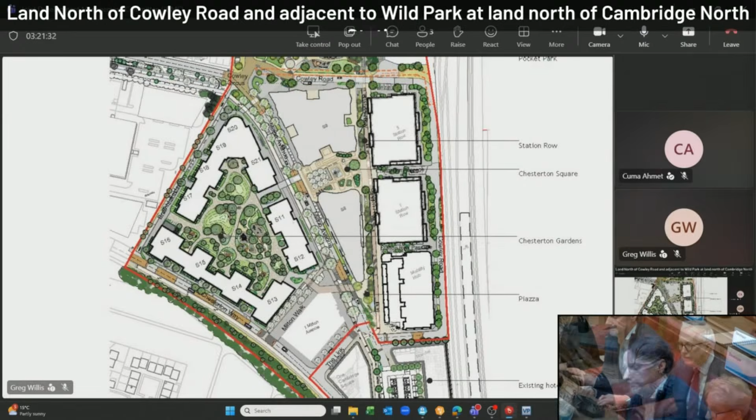Few other questions. No, Robert's looking at me with horror.

The SUDs system is part of an overall SUDs system for the whole scheme. The outline planning application requires that developers join up, and there's a management plan that explains how the drainage system works as a whole, and how the individual parcels that come forward work within that overall drainage management strategy.

You had a question on play. Councillor Smith. Play and the logistics area.

Right, just on play: it's divided into two areas. So in the courtyard that you were hearing about earlier from Blockwork, that courtyard garden space has a lot of play stitched through it, from doorstep play to LEAPs and LAPs and so forth.

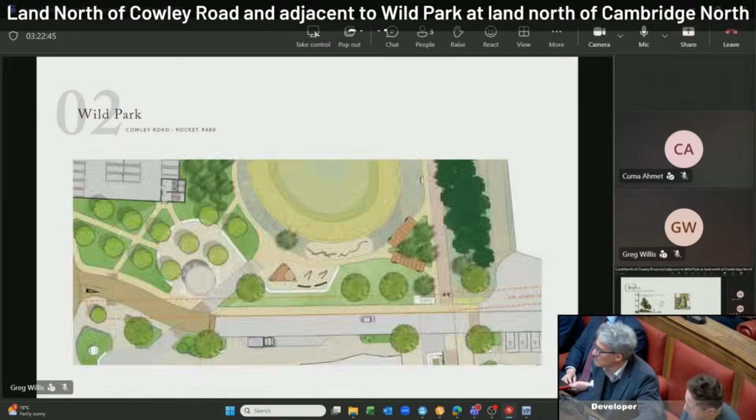And then we have a different sort of play within the Wild Park, which you can just about make out on this plan. We've got a series of play elements on the loop path that takes you around the SUDs pond, the balancing pond. You can see some areas of boardwalk designed to reference the old railway carriages that were found on the site.

We have more natural play using logs, balance beams, and those sorts of play elements. As children move around that space, exactly as per the approved layout, they will pick up various elements of play as they move around. There's a key area right next to the pocket park, and as you move around that space, they will find amongst the trees and in the landscape other elements of more natural play.

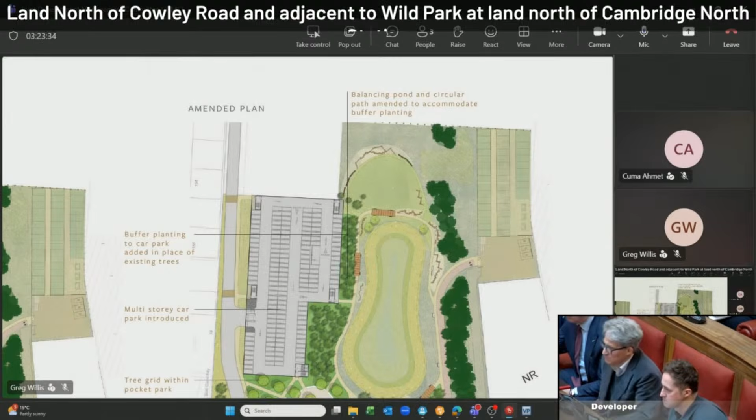Councillor Smith, what was your query on the logistics itself? Well, a little bit of explanation will help me.

What's the future use? The future use will be the multi-storey car park, which replaces that temporary area. That was never allocated for anything in the master plan, it was just left over. We utilised land that we can use for construction. If you look on the plan, immediately next to the lozenge shape is the area marked green—that's the area. It's just something we deliberately left over, not included within the master plan.

Okay, Councillor Smith, does that deal with your queries?

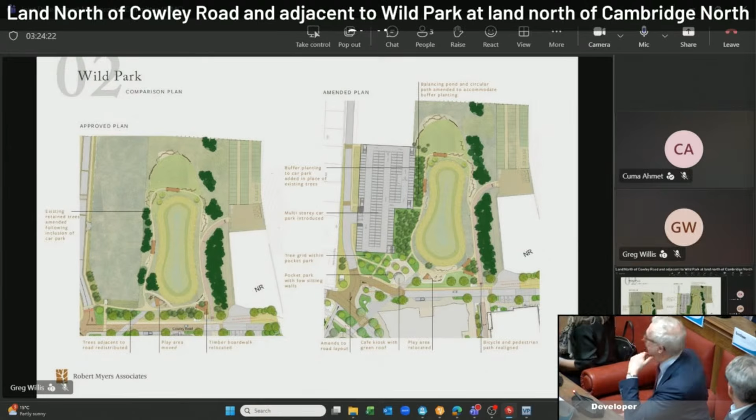Councillor Smart: three things, I'll be brief. Firstly, Wild Park is interesting, so well done on that—fingers crossed on planting and how it grows, and we'll come back to that in a minute. So protected and maintained for how long and by whom, including the play area? Second point: scrapping the basement saves a lot of money as well as carbon.

If you're interested in carbon, or in cross-laminated timber, you've got a perfectly suited rectangular grid layout structure and a very accessible site to bring in CLT from Austria or wherever. And finally, Robert Myers, I presume, won't be on the design review panel for this item.

Just on the Wild Park, we do appreciate that is already approved. We still have to submit details of the detailed landscape and planting, councillors. As a condition on the planning application, clearly the challenge is to make sure we get the right plants to match that up.

You asked another question around the Wild Park—the maintenance. Within the Section 106, because it's BNG orientated as well, we have to submit a 30-year management plan for the maintenance of that BNG space and wild space. We also have to set out, explicit within the Section 106, the management arrangement for the open space before we occupy the first phases of development. We have to set out and get agreement with the council on how we're going to manage all the open spaces and their management. The intention is to set up a management company that deals with that.

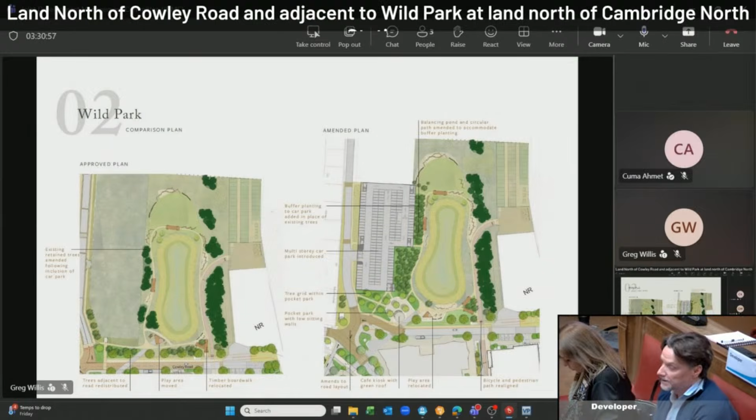Thank you. Just in terms of the balancing pond and the first public drain - there's a section of culverted original first public drain that goes just to the south of the balancing pond, and there'll be a controlled discharge into that from the balancing pond. The balancing pond is, isn't it, sort of the last SUDS feature of a series of SUDS features throughout the development.

Yeah, in terms of that, we discussed this at length with the planning officers. All of the cycles for the occupants of the building at 1 Milton Avenue are within secure areas - either inside the building itself, or within the cycle pavilion, which is accessed via locks. It's a secure, lockable place.

Councillor Thornborough: I'm interested in the landscaping at height on the building that you had. I think it's great for the well-being of people working to be able to get outside, not just at ground floor level, but at height. Oh, I think that was the commercial building - sorry, not this one.

I'm slightly concerned about overshadowing from the car park and its impact on the landscaping. Going back to the commercial building, it'd be interesting to see if there was the ability to spill out onto pavements for eating outside. It helps draw people in, opening up the windows in the summer, so there's a kind of inside-outside space, like we've had since COVID, which is really nice and really popular. When I saw this image I thought you'd got a little outside cafe there that could be linked with something inside, but it's the bike store. Anyway, just comments really. Thank you.

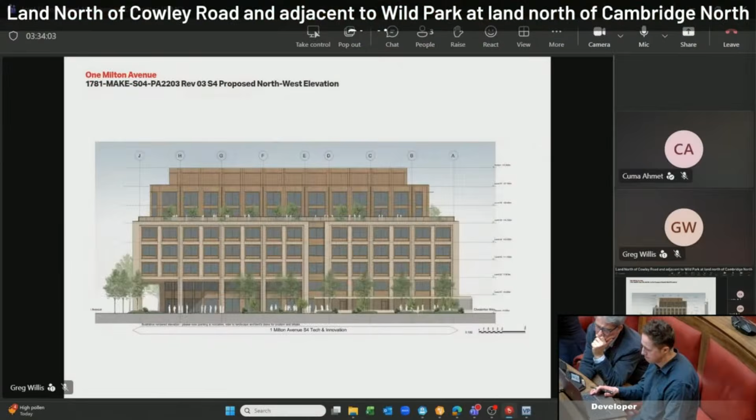Could you just show some of the sun? This is just a quick running answer - the landscape, you see the direction of the sun. It will be a very, very sunny spot, so it won't be shaded, fortunately. It'll be a lovely sunny space for people to spill out onto.

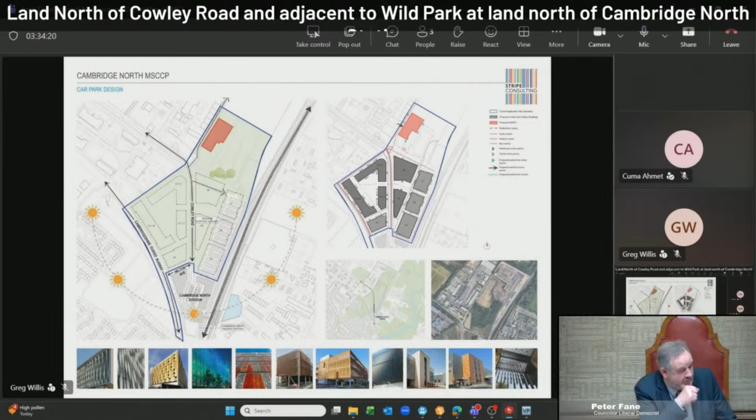The reason we've come forward with the multi-storey car park is it's a critical piece of infrastructure to make this viable and allow us to develop the next phase of this development. Everyone's worked so hard on it. It's challenging times at the moment, but the multi-storey car park is the key piece of this jigsaw. This is the most important element of Cambridge North - if you don't have your front door here, the science park and all the connectivity from the first presentation disappears, because you've got to somehow get from the station through a desert to the areas beyond. So this is key. If we can get this car park approved, we will be starting at the end of this year, and that will give us the ability to fund and get going with the rest of the commercial buildings on the scheme.